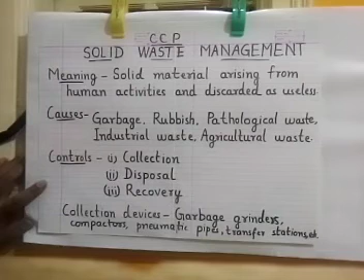Now, first coming on to collection. So, what is collection? Efficient collection and transportation are essential parts of overall solid waste management. Some common devices used for collection are garbage grinders, pneumatic pipes, compactors, transfer stations, etc. All these are collection devices which are used in different setups for collecting different types of solid waste. The next type of management is disposal. So we will go to that.

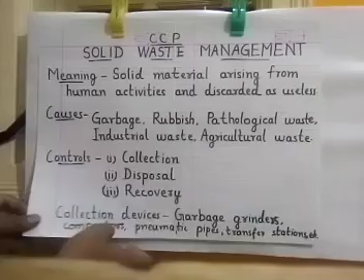Disposal methods are open dumps and sanitary landfills. That means the solid waste can be disposed either by dumping in open places, or by making sanitary landfills. These landfills are nothing but a part of land where other useful work is not done. The land is used for dumping all the waste, and it is covered after some time. Now, open dumping obviously leads to different kinds of pollution, so that itself is not a good practice. So, we will concentrate on sanitary landfills.

Sanitary landfills are engineered operations. They are designed and operated according to acceptable standards, whereas open dumps are simply dumping places. The basic principle of landfill operation is to deposit the refuse, compact it with bulldozers and cover the material with at least 6 inches of dirt or soil at the conclusion of each day's operation, and a final cover of 2 feet when the area is full. That means when the area is full of solid waste, a 2 feet thick layer of soil is put on it as a final cover.

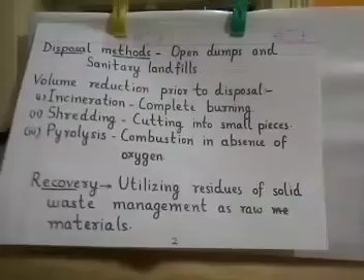The landfill operation is in fact a biological method of waste treatment. Under anaerobic conditions, organic matter is degraded to more stable forms by microorganisms. The end products are mostly CO2, carbon dioxide, CH4, methane, NH3, ammonia, and a little bit of H2S, hydrogen sulfide. These are allowed to escape through small vents in the sanitary landfills.

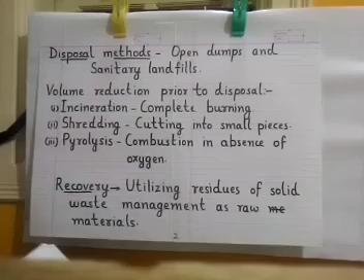Now, before doing all these activities, we should reduce the volume of disposed material so that it occupies minimum space. So, volume reduction prior to disposal is very important. Since land may be an expensive commodity, the cost of landfilling can be very high. Accordingly, various methods are adopted to reduce the volume of waste. Number 1, incineration. Incineration is nothing but the complete burning of the material to be disposed. It reduces the volume of waste to about 20 to 30% of the original volume and makes the product stable. Stable means the product will not do any further chemical reaction.

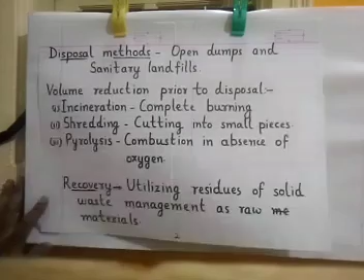Second method is shredding, that is cutting large pieces of waste into smaller pieces. Larger pieces of waste occupy huge volumes and smaller pieces occupy lesser volume. So, shredding is also very important in volume reduction prior to disposal. The third and important method is pyrolysis. Pyrolysis is combustion of the material in absence of oxygen. The residues of this process are of economic value. The combustible gas, tar, and charcoal are raw materials for other processes. Pyrolysis not only reduces the volume but also produces stable end products.

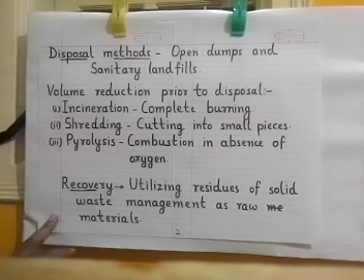Then the third step of solid waste management is recovery. Recovery is the method of utilizing residues of solid waste as raw materials for other processes. For example, fly ash from industry is used to make bricks. Bagasse from the sugar industry is used to make paper of good quality. Likewise, various metals are recovered from electronic waste. So, recovery is a very important part of solid waste management because it allows the utilization of residues of solid waste as raw material for new processes. So, these are the methods of solid waste management.